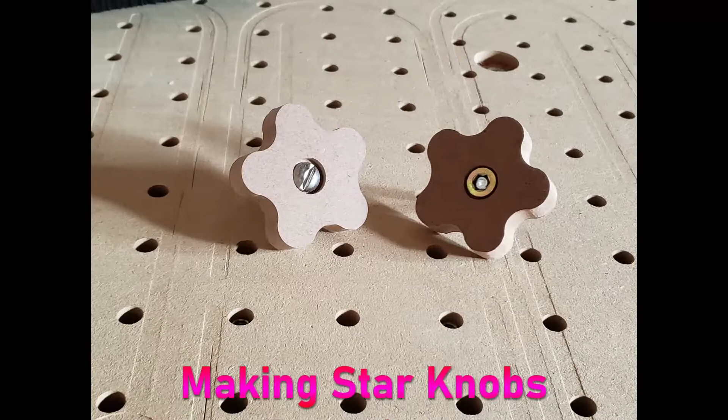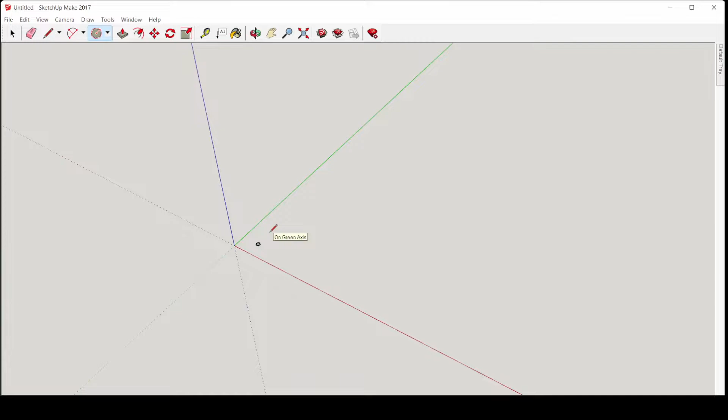Today we're going to go through start to finish making some star knobs, kind of make it easier to get clamps and hold downs done. I'm using SketchUp Make 17 here, but the concept's the same regardless. I'm going to start off with a 5-sided polygon. Get it a little easier to see.

The first thing I'm going to do is mark the exact center of this. That way I can get a spot for my bolt hole to go through the knob. Get rid of the guides. Now I'm going to go through and split up each of these sides.

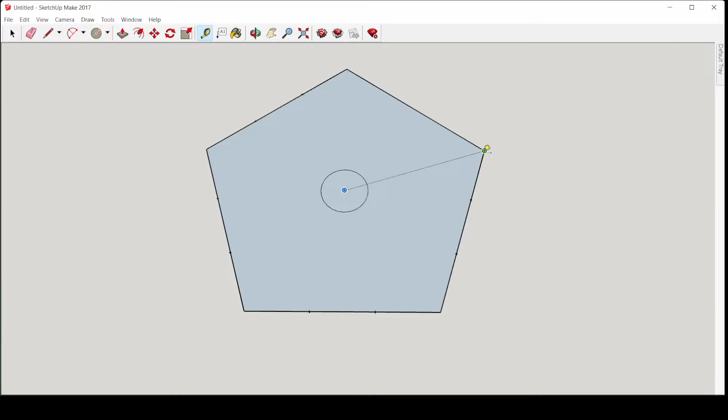And all I really need are these tick marks on the edge. That's what we're going to align things to get the bulges and the concave sections built out. Now we'll just connect the dots, give it a little arc. We're going to bulge out on the corners and pull it back in between.

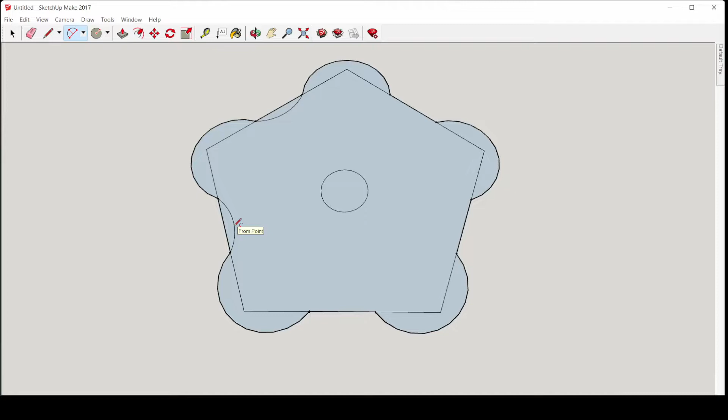That took care of all the convex sections. And now we come back with the concave sections. And take out the center for that bolt hole. And yes, I did forget to do that last concave section. And when I go to delete these original polygon lines, got to go back and add this one.

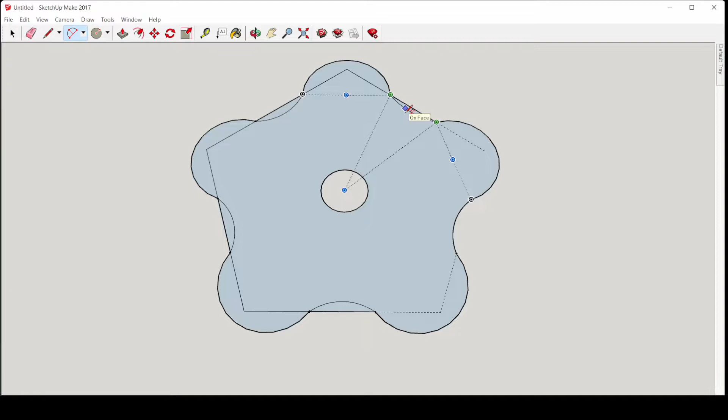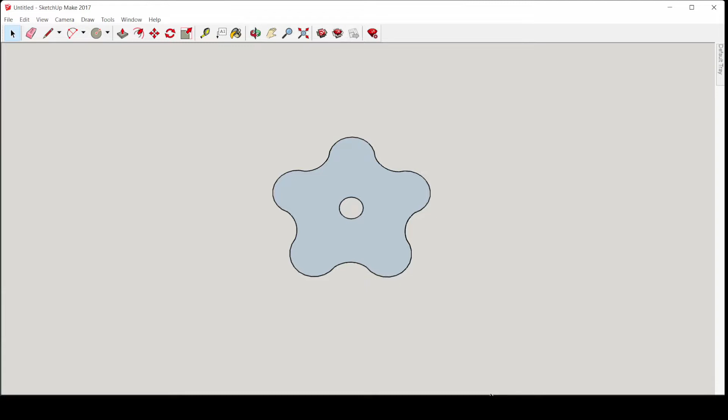I'm just getting rid of the original pentagon shape. The dotted lines are the guides from before, so we'll get rid of those. And that's pretty much it. And go down and use this plug-in to lay out the SVG of it. And put it way down there in the corner, so I'll just go ahead and move the drawing down there too. It doesn't have to, but may as well keep them together.

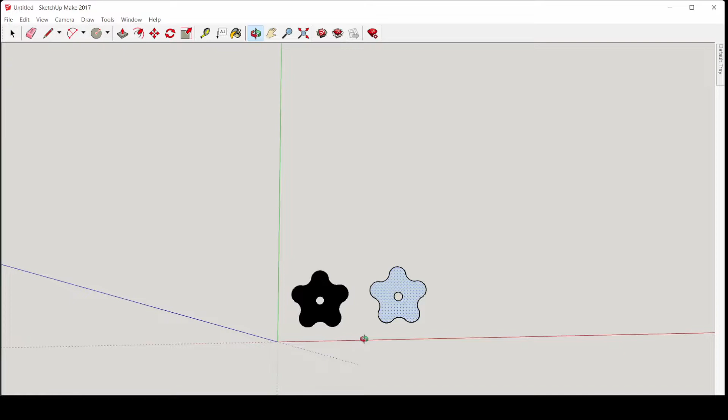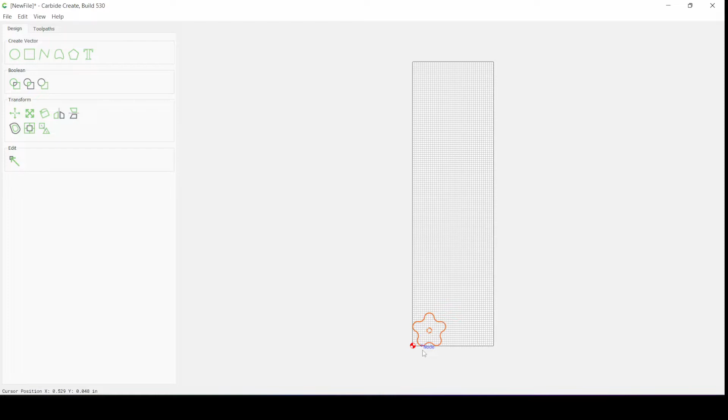And I'll just select that SVG and write it out. That's what I'll use in the next step in Carbide Create. And here we are in Carbide Create. We just import that SVG. That bolt will go through that hole fine. This is for 1/4-20. It's actually a 5/16 inch hole.

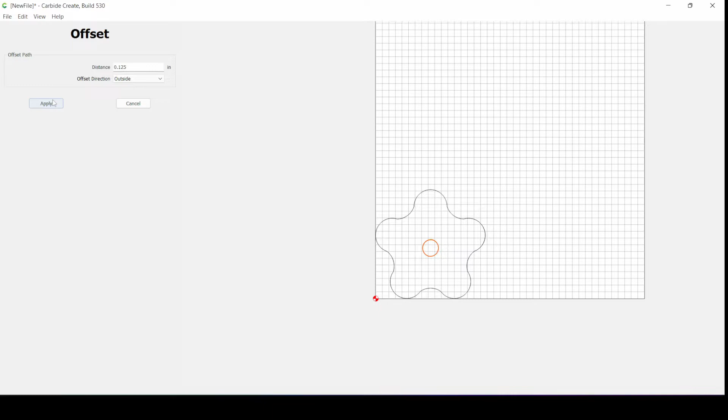But I'm adding an offset that I'm going to pocket down to kind of sink that bolt down into it. And it'll also allow us to put a threaded insert in and keep the flare below the knob. It's entirely optional, but that's what I'm doing. Now I'll just copy it, move it over, put a little space in between the two because I'm going to have to go around each one, and I'm going to add tabs to these.

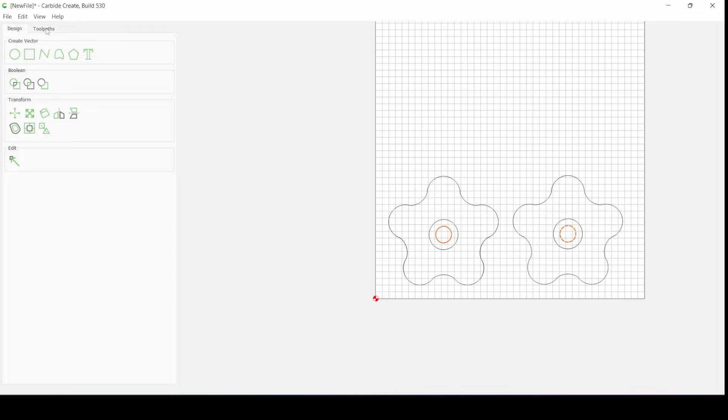Now it's toolpath time. And I do pocket out my bolt holes. I don't drill. Not a big fan of drilling with my router. If I want to drill, I'll just get the drill out. But pocketing a 5/16 inch hole with a 1/4 inch end mill works pretty good. Now I'm just going to take it down 1/8 of an inch. It's going to give that little recess for the bolt head or the threaded insert flare, depending on which end you use.

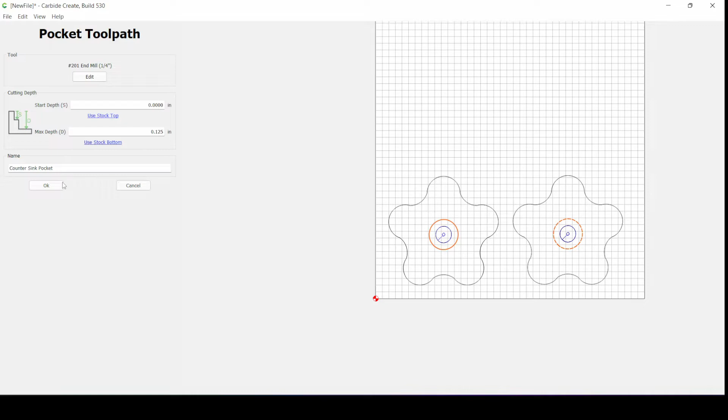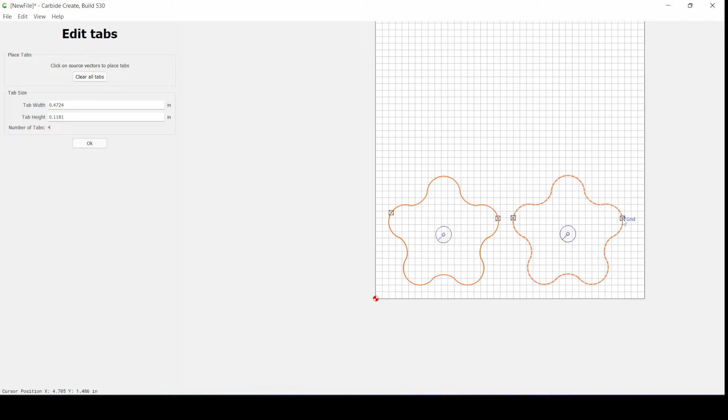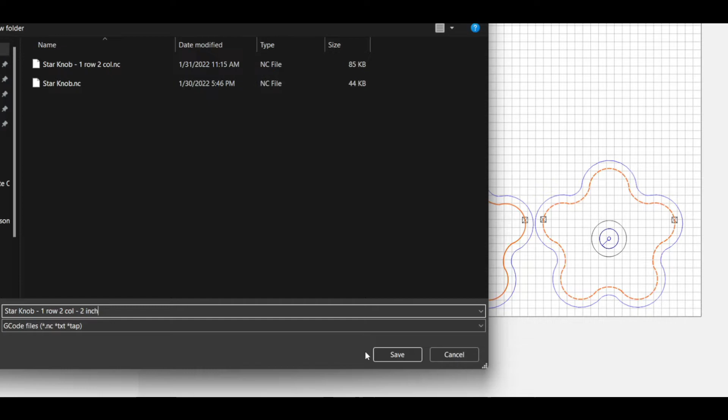Now a contour toolpath to cut it out. On the outside, now I'm going to add 2 tabs each. And these 2 in the center should pretty much make it one piece. And write out the G-code file. Now I'll move into actually cutting them out. I was going to speed this up, but it really doesn't take too long. Still not sure how Carbide Create figures out its toolpaths, but it works.

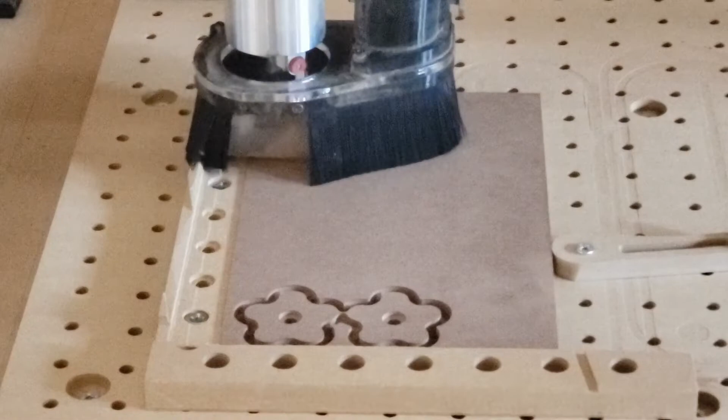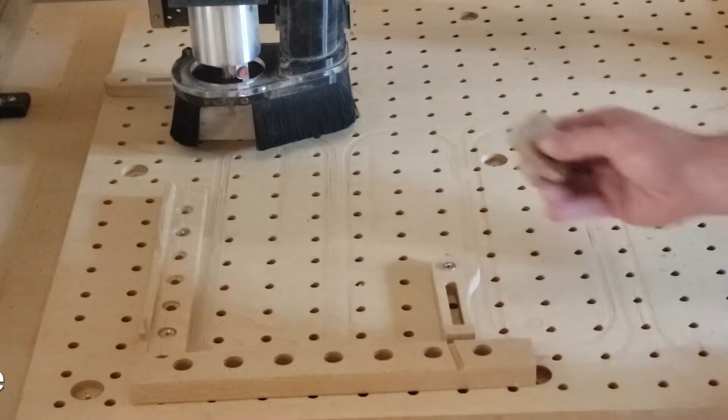Bolt holes first, then the pockets for the countersink, and then a few times around to get the knobs. That's it. Shouldn't take too much sanding, but you know it's coming. And with the sanding done, we can get rid of these screws. Or at least the need for a screwdriver.

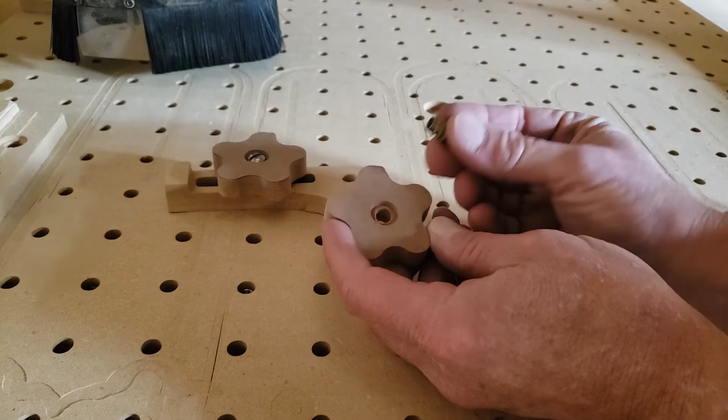Here I've just taken one of the star knobs, put a bolt through it, put a nut on the other side, tighten it up. It's not super tight, but there's that pocket that allows the bolt to stay flush with the top. A whole lot easier than looking for a screwdriver. And in case you want to use this to tighten onto a bolt, just take the threaded insert, screw it into the knob,

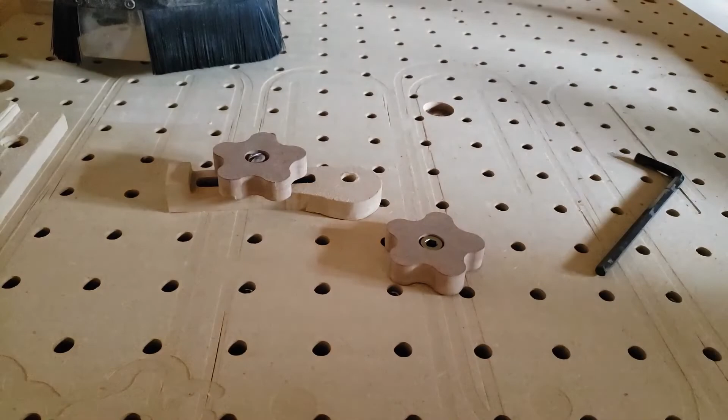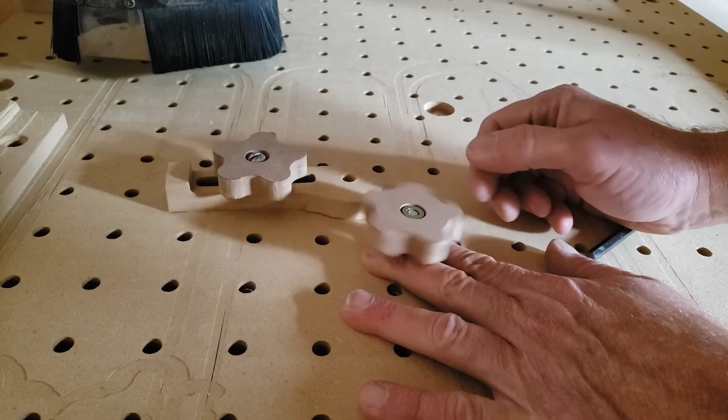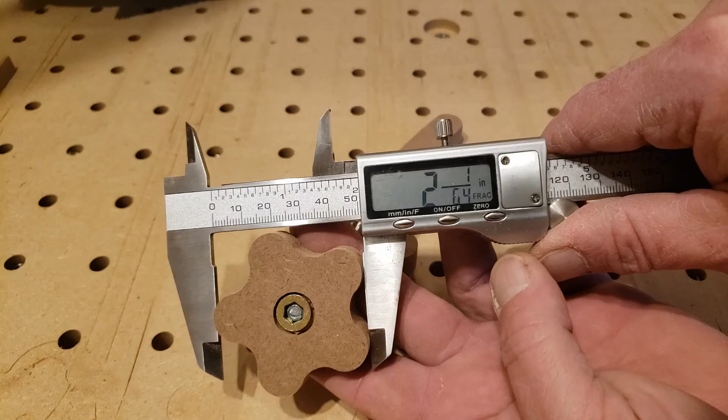and this is actually going to be used on some of the jigs I've got going. There you go. One male, one female, same part. There's the actual dimensions, both inches and millimeter. And there you go, start to finish, from a polygon to star knobs, male and female.